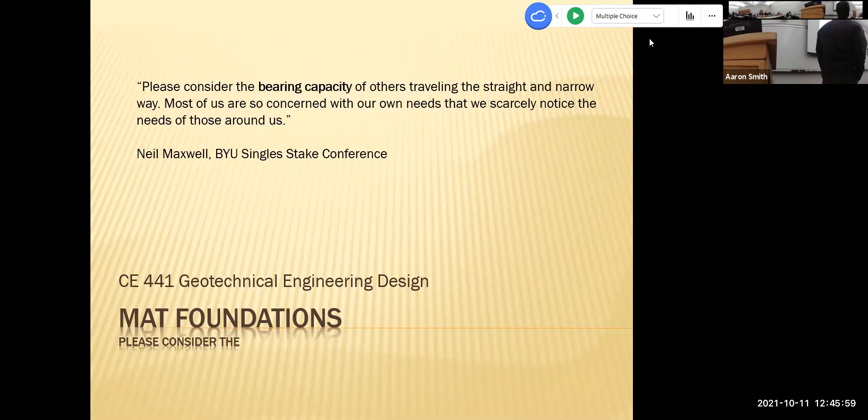A long time ago, when he was speaking to the singles stake conference, he says, 'Please consider the bearing capacity.' We could just stop right there. An apostle said the word bearing capacity. I love that. You should go search, find any others, go hunt. I would love for you to send me an email if you find a quote from a leader who talks about soil mechanics in their quote.

This is awesome. Please consider the bearing capacity of others traveling the straight and narrow way. Most of us are so concerned with our own needs that we scarcely notice the needs of those around us. We all have a certain amount of capacity we can hold up, and sometimes we fail, right? The load gets so much, we just burn out. It gets hard, it's tough. It happens in school, we just get, there's tough times. All of us have difficult things going on, and we're very concerned with ourselves, but be considerate of others, pray for others. I appreciate that prayer, Cindy, praying for others.

Okay, so let's start with some questions today before we go. And I heard through the grapevine that this is rare, if it ever happens, it's rare. The book has a mistake in it. Is that what I heard? Is this true? Could this really be?

I don't know. So let's do problem 5, or 5:16, together. Is that the one that has the 7:13? What chapter are we in? 7:16 or 5:16? 5:16, okay, 5:16. That was the one where we had that influence method where you had to have fun drawing little triangles and rectangles. Let's do that one together.

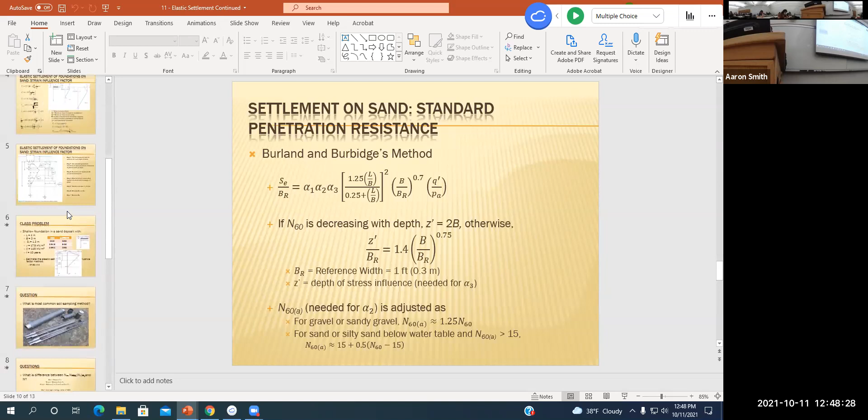Let me pull up a different lecture from last time. Let's see, elastic settlement. We were talking about this method right here, just look familiar, this is what our problem's all about. It gives us this equation, and it says, and so we need to figure out - we have a continuous footing, and we need to figure out how much it settles. Our equation that we're going to use is at the top, and we need to figure out all these things.

Now, I think we can just start with the low-hanging fruit, the easiest values to grab are these C1 and C2s right after that, and they're given to us right here.

The only thing we need to understand is what's the difference between Q and that Q with a little dash on it. Who wants to teach? What's the difference between Q and Q dash? Oh, Q dash is your effective stress minus your load, the load of the footings.

So in our problem, what is our Q dash? Perfect, so we have little q prime equal to 195. Does everyone feel good about that? Okay, so we do need that for this C1 right here.

But what about the top, the numerator? What's Q? Effective stress at the base of the foundation. So how do we calculate that again? We need to get this Q now. It's effective stress, it's the unit weight times the depth. So what's our unit weight of our soil?

18. Okay, so how deep are we down to the base of the footing? Is that what it says right here, the base of the foundation? 1.5. Okay, so what will this equal then? 27. Okay, so we can knock out C1.

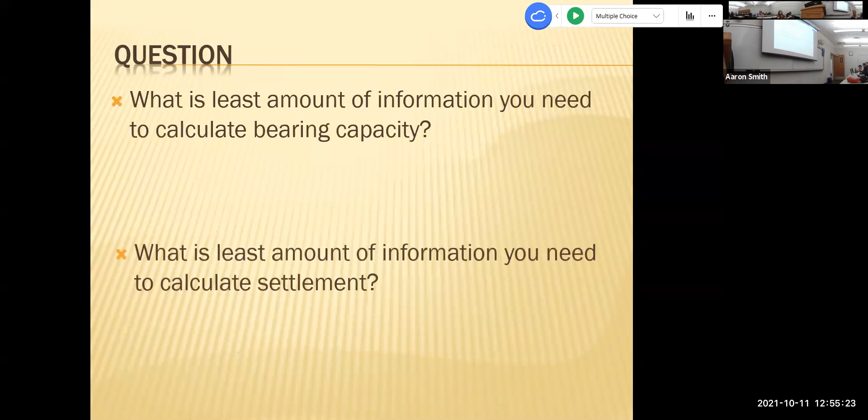Okay, so far we've kind of figured out some of our variables, but now the hard part begins, making a little picture. I don't have a very good picture to use. Let's see.

But we need to make something that looks like this. This is not your example, but we need to draw a picture, and we need to draw two side by side. The book gives us this picture right here. There's 3 different zones in the picture that's given to us. And then next to that, we need to draw the picture the book gives us, and right off to the side of that we need to draw this little triangle.

The triangle starts at 0.2 up at the top right there. And then we need to calculate this point, because then we'll just draw a straight line down to it. We need to calculate what its depth is. What is Z1? We already found out, we told ourselves Z1 is going to equal B.

So what is B? In this problem in the homework, I think the homework said it was 2.5. So we're going to draw a little triangle that starts at 0.2, and it's going to go to some maximum influence value, and it's going to occur at 2.5. That's what we know so far.

And then from that maximum value, which we haven't calculated yet, it's going to go in a straight line down to Z2, where there's no more influence, meaning the soil doesn't feel the weight of this footing anymore. That's going to occur at Z2, which we now know because we chose the chart, it's going to equal 10, right? 4 times that base. So we kind of know some points on the chart.

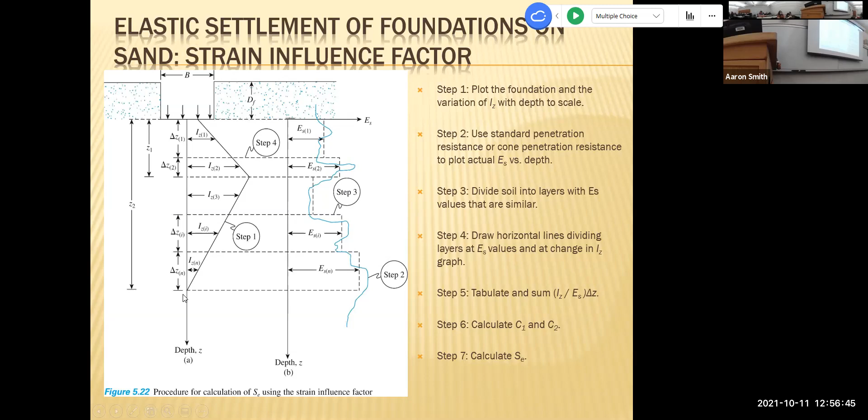We know where it's going to terminate at depth, and we know where it's going to start. We don't know this — how do we calculate this I max value? I think that was given to us right here. It doesn't really say it clearly, but I max, IZM, M stands for max.

It's going to equal 0.5 plus 0.1, and then it's going to use some of these Q's right here. But then it throws this weird value at us, Q prime Z1, whatever that means. Hopefully we have an equation for that somewhere. So to find the max, let's just do that equation really quick.

I think this is where things start to get squirrely. IZM equals, what do we got? We have some values that we already know. We can do 0.5 plus 0.1. Then we know some of these values, right? We know, what is that? Q, the big Q prime, what's that value going to be?

195. And then we're going to subtract what from it? 27, which we figure out over there. Then what goes down here? And that's where the big question is, right? That's where the book maybe has an error.

It does, it's a mistake. QZ1 — it's not defined on this page. I think we have to go to our textbook to figure this out. Let's see if we can figure this out. What page would it be on? I think this equation is on 258.

Okay, 258. Where is it? Oh, there's at the bottom. It says QZ prime 1 equals, it's at the very bottom of page 258. It says it equals the effective stress at a depth of Z1 before construction of the foundation.

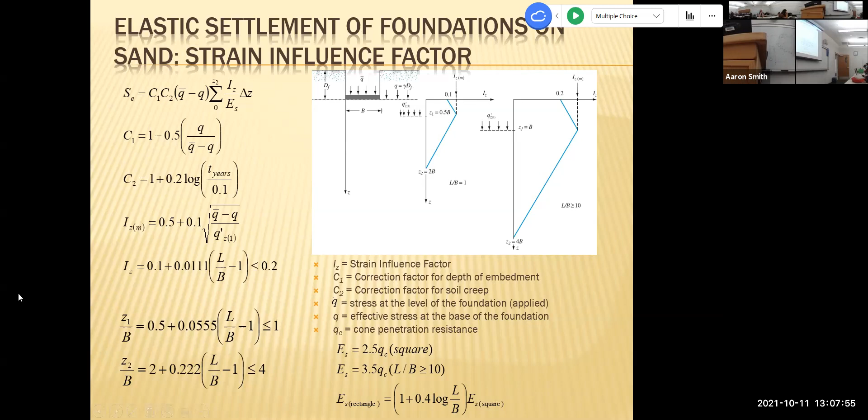Any other questions about that one? That was a good one. And the others were way more straightforward—we just used the N value, the blow counts, and estimated settlement.

So far we've talked about bearing capacity of soils, many different conditions—interlayered soils, stiff soils over soft soils, a water table in there, slopes. We talked about slope safety and factors of safety on different slopes. We talked about settlement, and there are many different ways to do settlement.

So today we're shifting gears. We're moving to a totally different topic, and we're going to talk about it for the rest of the class. Really, we're kind of done talking about settlement and bearing capacity. Now we want to start designing foundations—this class is about designing foundations.

But before you can design a foundation, we had to first understand that most soil fails in one of two ways: either too much settlement or not enough bearing capacity. So you'll have shear failure, the building will tip over. Now that we know how buildings fail, let's learn how to design walls, piles, and different kinds of foundations. That's where we want to go.

So we're going to start, and we're going to go pretty quick for the rest of the semester. We'll spend about 2 days on each of these different ways of designing walls, foundations, piles, and drilled shafts. Then we'll round up the semester talking about ground improvement—you roll up onto a site with terrible conditions, how do you improve the ground? That's where we're headed in this course.

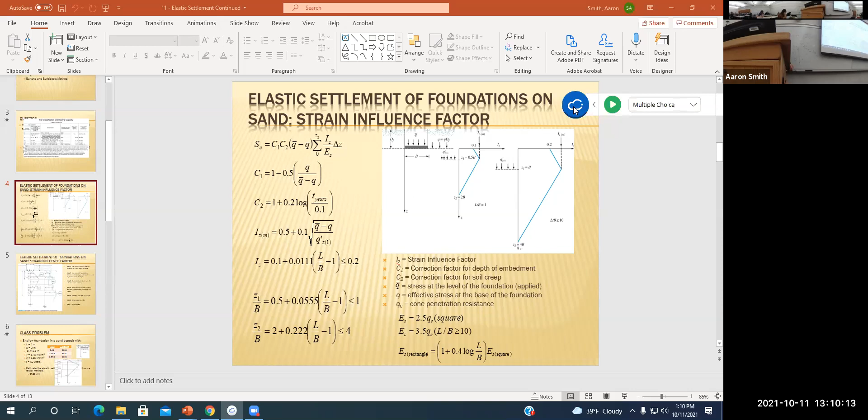If you have a question about settlement, you probably will see a lot of these. I should pull up the PDF, the technical portion you can use—you have all the equations for the FE exam in that packet. I'll make that available to us at some point. Hopefully some of these will be familiar when you see them. That's the whole point: if you ever have a quiz or test question, you want to recognize, oh yeah, I've seen this kind of before, I recognize some of the factors.

Let's try iClicker though. I want to make sure we have iClicker accessibility, so log in—this class is under 441. Let's just see if we have iClicker available. I do have a few, but I just want to see our level of understanding, really how much we remember from 341 as we talk about a new topic today.

Chapter 6, mat foundations—that's where we're headed. And while you're loading up iClicker, oh, you're fast, I got 15 responses.

I do want to read the introduction to mat foundations. It says: under normal conditions, square and rectangular footings, such as those described in chapters 3 and 4, are economical for supporting columns and walls. However, under certain circumstances, it may be desirable to construct a footing that supports a line of two or more columns—these footings are referred to as combined footings. When more than one line of columns is supported by a concrete slab, it's called a mat foundation. That's kind of where we're going today.

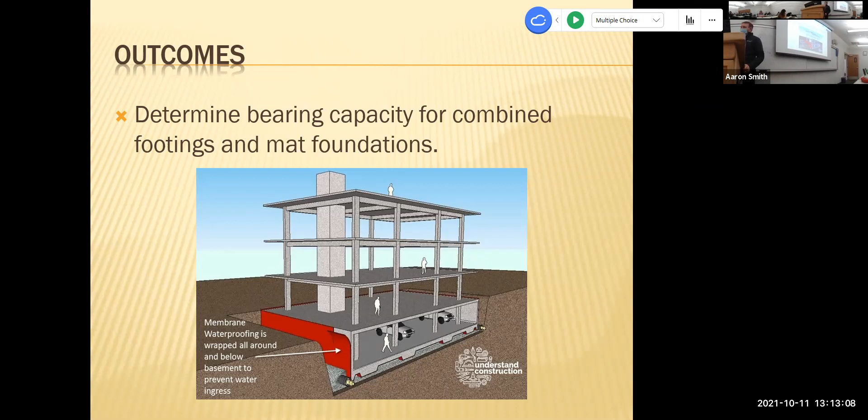That's what we're talking about right here, the concept of this foundation type where you've got one continuous foundation supporting the loads. No more strip footings, like you see on residential homes going around a home's wall, or just square or circular footings anymore. We want to talk about how you determine the bearing capacity for something with a combined footing or a mat foundation, also known as a raft foundation.

So question: does the ultimate bearing capacity typically go up or down when using a mat foundation? What do you think? Is that the idea of using a mat foundation? Does that help you or hurt you for ultimate bearing capacity? Let's give out 2 responses. Well, another iClicker question, we'll have maybe 3 or 4 of these today. I just want to see what you think, and the only way you'd know this is maybe through the reading or watching the video before class.

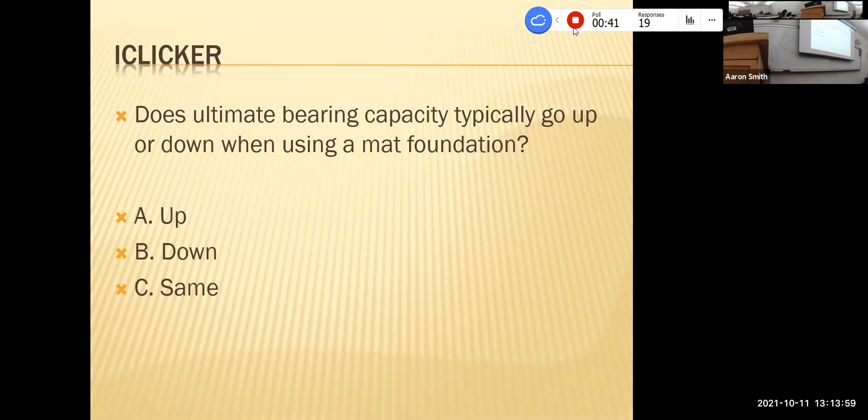Ultimate bearing capacity of the soil, up or down? Well, I guess the gross bearing capacity. Maybe I should put gross. Yeah, all right, good job. There's 19 responses, 20, even better. Okay, it goes up. It does go up. That's perfect, right? You have more ability to hold load because you're making a bigger and bigger footing.

There are some things to worry about though. We did hint before that if you start packing two footings closer and closer together, their zones of influence do intersect. At some point when you get two of them really close together, they intersect so much that you actually just design it as one.

So when you have two footings, this one can hold like 2,000 pounds, this one can hold 2,000 pounds. As you get closer and closer together, yes, they can both combined hold 4,000, but at some point they intersect too much and influence each other, so they can't hold 4,000, maybe it's a little bit less. But then there's a sweet spot where, instead of having two footings, you design one big one that can ultimately hold more, let's just say 5,000. I'm just throwing average numbers out there, but there's a game we have to play. Now we're just going to consider the fact that we have one big footing.

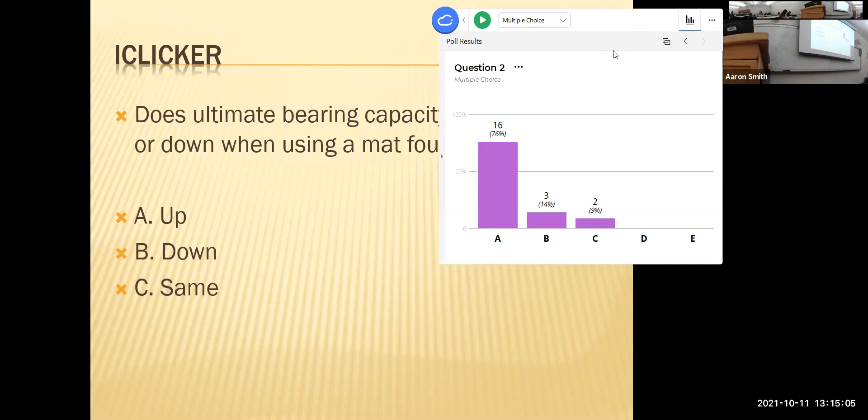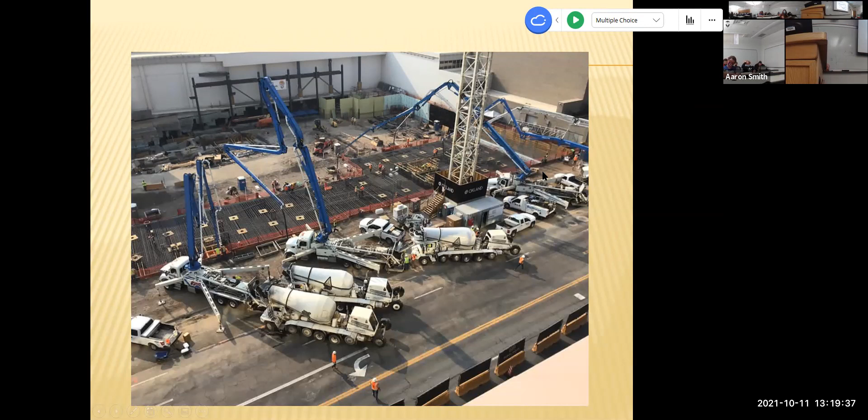So this footing right here, this is actually from the Hyatt project that happened in Salt Lake a couple years back. And again, another mat foundation, same picture, different angle. Look at all these pump trucks—1, 2, 3, 4 pump trucks going in. This was a project with lots and lots of concrete, a huge mat foundation. This took a lot of... if you guys like testing concrete, this would be a wonderland.

So here's what I was kind of wondering, what kind of approach do they use for the tall towers in New York? Oh yeah, they're so massive. Those are usually drilled shafts, and we'll talk about those in a little bit. Drilled shafts are just like giant piles, but instead of driving the pile into the ground, you actually auger out this big hole, 5 foot diameter, 10 foot diameter, go down 100, 200 feet, whatever it is, put a giant rebar cage in there, backfill with concrete. So then you have this giant concrete pillar, lots of them holding up the Twin Towers or something like that. Yeah, and it's expensive and it's massive. And it's exciting to be a part of big projects like that.

I hope all of you get a chance to be involved with some big project, whether as the concrete truck driver, the technician, or the guy in the field. I don't care what part you play. These are just cool projects to be involved with. I love projects like this. So 20 years from now, if you're just not getting out in the field enough, volunteer to be a concrete truck driver. You can see some cool things.

Let me tell you about this project though. It was big. It was a mat foundation. Oakland was the contractor who did it—I think there should have been an A in there, O-A-K-land. Concrete team was pouring 7,000 cubic yards. Mat foundation, Hyatt Regency, Salt Lake City. It's standing there right now, doing good, 26 stories tall. The pour began Friday night at 5pm and was completed 6:30am Saturday morning, so 13 and a half hours, 2.4 million pounds of rebar. You can see those mat foundations, lots of concrete and steel in them.

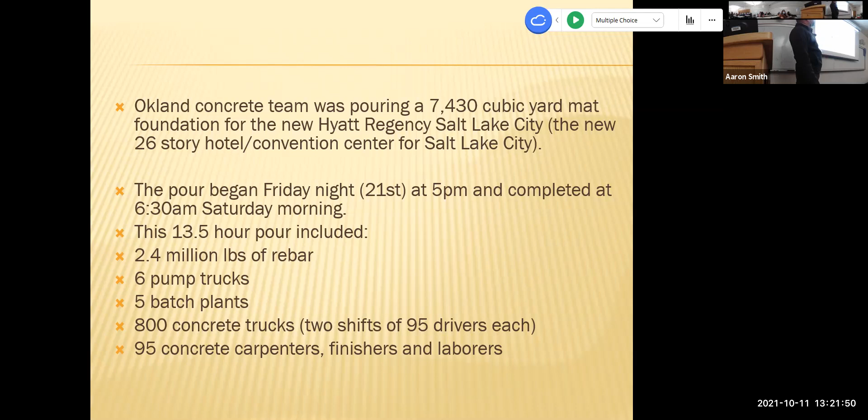6 pump trucks, 5 batch plants, 800 concrete trucks, 2 shifts with 95 drivers, 95 concrete carpenters, finishers, labor—lots going on. If you were a concrete technician, you were probably standing at each pump truck, sampling maybe every 4th truck, pouring as fast as you could. So by the end of the day, how many sets of cylinders would that be? For 7,000 cubic yards, if you're testing every 100 cubic yards, that's 74 different sets of concrete by the end of that day. If there were 6 technicians at each pump truck, in 13 hours you'd probably make a dozen sets, maybe one every half hour. That's a lot of work.

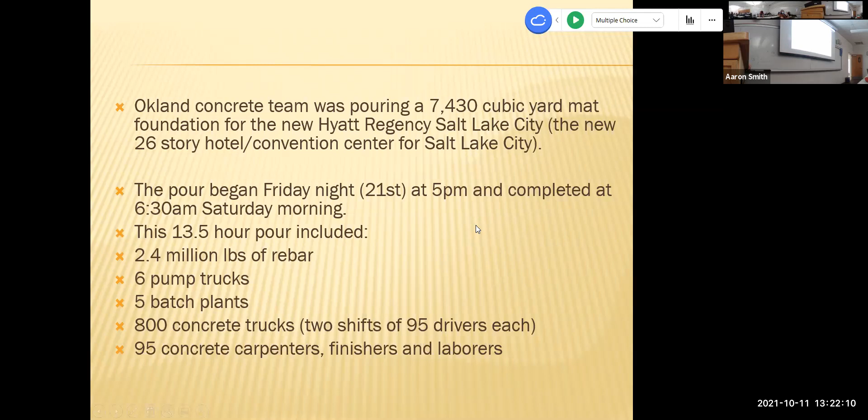Anyway, fun projects, they're big, there's a lot of steel involved. This is actually inside the mat foundation, looking out, from Okland Construction's website, of that concrete pour. This is a massive amount of steel. In that steel class you guys are all taking right now, maybe you can tell what kind of rebar this is—you can see the stamp up there. It's like an 8 bar, about 1 inch diameter, a big bar.

Impressive. Mat foundations are strong. It's what you do when you've got poor soil to build on. But we need to talk about the bearing capacity of these. Before we calculate it—and you're going to like how to calculate the bearing capacity of a mat foundation, it's not too crazy—I just want you to tell me: what are some reasons why you would choose a mat foundation? We're not going to have multiple choice questions, but what do you guys think? What are some reasons from the reading or just intuition? When would you do it? Why would you do it? What are some thoughts?

You've got to distribute the load of the building over a really large area—it's not just one specific spot where a foundation sits, that's the entire area. So there's a lot of column loads coming down. Would you want it for soil that's just not as strong? Yeah, you've got to spread it out. If you designed a bunch of small footings but found the soil so weak you had to make them not 5 feet by 5 feet but 10 feet by 10 feet, now one column footing butts up against the next, and you end up designing a mat foundation anyway when you originally were just trying to do spot footings individually—because the soil is weak.

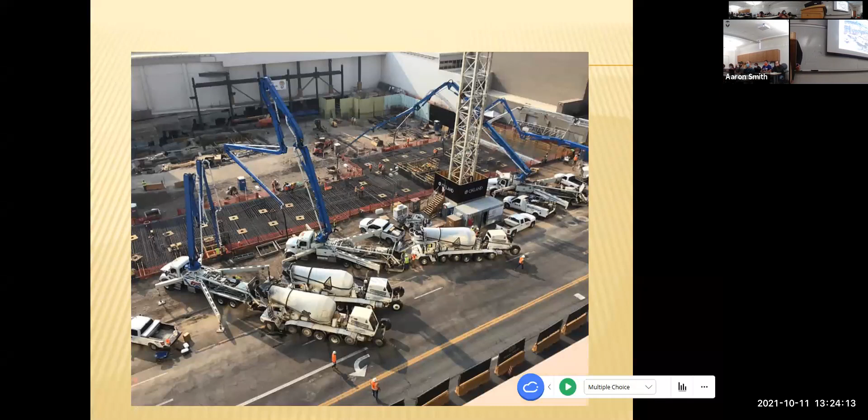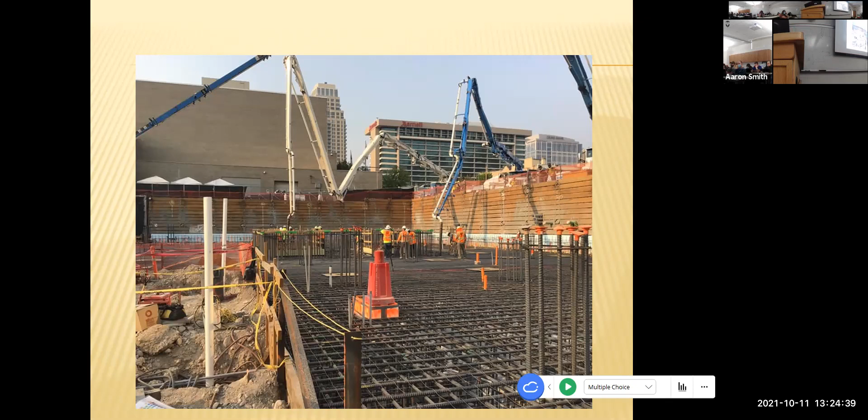What else? What are other thoughts, other observations from some of these pictures you saw? What are some unique things you're seeing in this picture—like how close is this pour to the neighboring structures? Look how tight this is, these tight quarters. There are big buildings all around here. When you have a footing that comes down, a normal footing, you design it like this—so if a column comes down, you want a footing like this. But what if this is the property line right here, and your neighbor's already taken this? You can't build a footing that looks like that. It just doesn't work, so what you have to do is create this giant mat foundation.

So the amount of real estate you have would be a reason. As mentioned, if the soil has low bearing capacity, the load has to be distributed over a large area. If you're designing all these spot footings and find you cover up 50% of the area anyway, why not just go and do a mat foundation?

Is that because you would save on labor? Yeah, it just makes it easier. Maybe you'd have to make each footing so beefy and thick, but you could thin the mat out a little bit and just spread it over a whole big area. So you'd save money in the end.

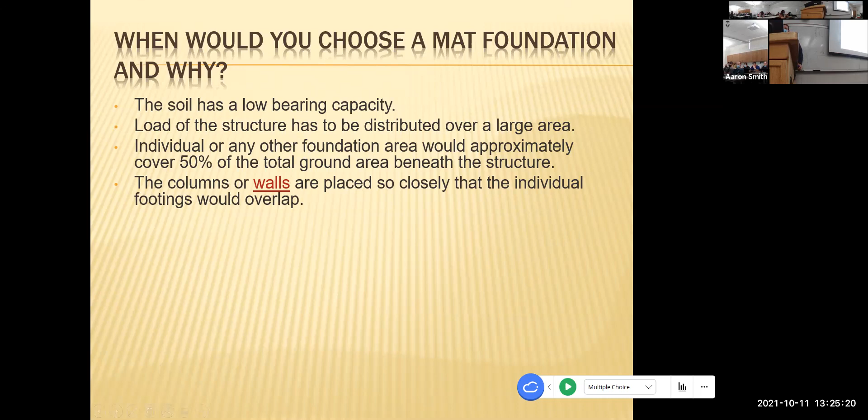This is what I was talking about. The walls are so close, so on the side of the building the stress on the soil needs to be reduced. Differential settlement: if you have a bunch of single footings over this big area, you run the risk of a site with different soil conditions from one end to the other. Maybe this footing will settle half an inch, this footing will settle an inch. You don't want all these little possible cracks from one footing settling more than another. If you just had one big mat, it would bridge over any of these soft spots.

This is the same thing when the soil strata is unpredictable and there are pockets of compressible soil - go ahead and use a mat that will bridge over anything. In Florida, they have a lot of karst topography where water could carve out little caves under the ground. If that's a possibility, use a mat foundation. Because if you just had 5 or 6 footings, what if one of those was over a cavern? Whereas with a mat foundation, it could bridge and handle an area that's softer. Or if you do a basement, that's a good idea as well.

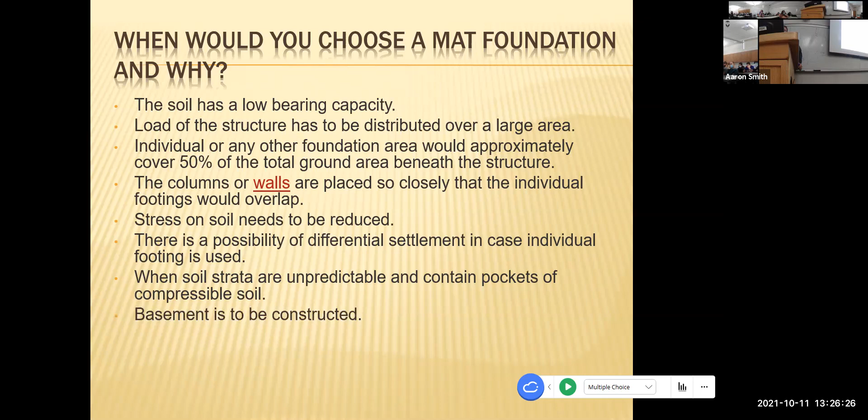I'll save these videos for later. They're just on how to compact ground. If we have time, we'll get to that.

Let's talk about situations where a single foundation may extend beyond the property lines - how would you even design it? Normally you'd have a footing that comes down as a nice square, circular, or rectangular footing. But what if the property line's right here? How do we design a foundation like this? We have property lines, and normally your footing would extend this way, but you can't now.

The method is first you've got to figure out where the two loads are coming down - Q1 and Q2, the big loads coming down from your columns. The area of footing you'll need to support that is equivalent to the total load divided by the net allowable bearing capacity of your soil, then you'll know the area. Then to figure out the total lengths, you follow a process to calculate the length between the two footings, and the width.

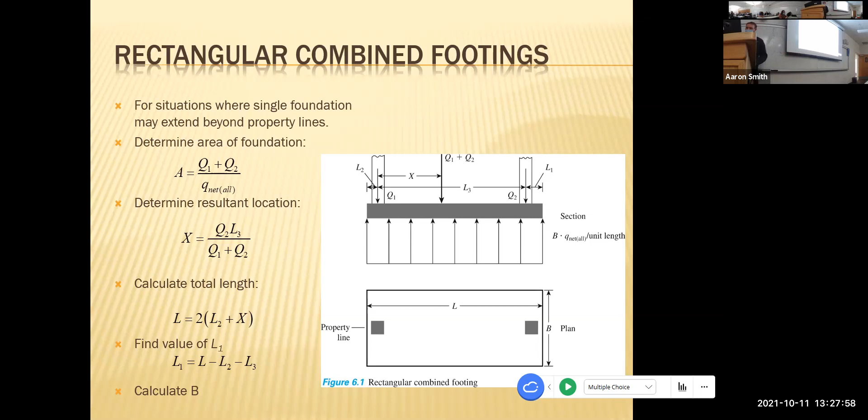Mat foundations have this method you can follow - it's not too crazy, you just slowly go through the steps to design it. A mat foundation normally has lots of columns coming down on it, and you don't just have to do rectangles - you can do trapezoidal areas, many different shapes. Maybe one side of the structure is a lot heavier than the other. There's an approach to figure out the total area you would need.

If the area ends up being over 50% when you're just doing little footings, you can go into this approach to see what shape and area you'd need to hold up your foundation. Of course, if your loads are so immense, maybe a mat foundation won't work. A mat foundation works if the loads divided by the bearing capacity of the soil can fit in the area of property available to you. But there are conditions where the building's so big the area needed is bigger than the real estate you have. So mat footings are maybe a middle step towards a deep foundation - we've been talking about shallow foundations.

Mat foundations would be the next level. If your mat foundation area still wouldn't be enough to handle these loads - Q1, Q2, Q4, 5, 6, 7, 8, all the loads - this is just showing 2 loads, but you may have a situation where the area is just not big enough to hold this load. And so that's when we're going to get into deep foundations.

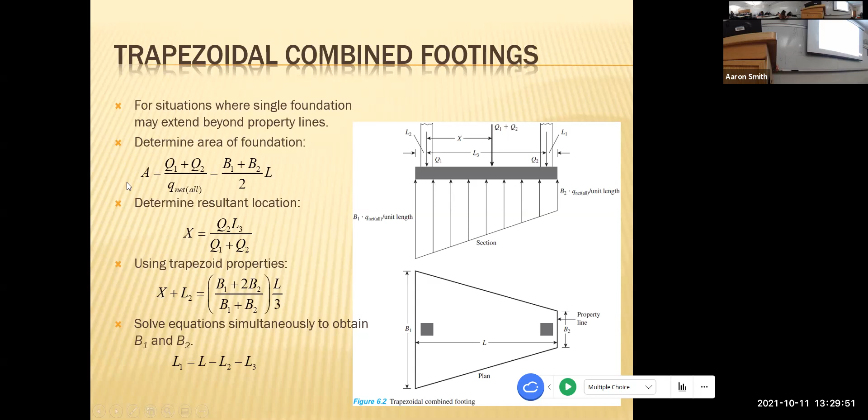Just know that mat foundations kind of are the middle ground. There's ways to figure out how much area you're going to need. Normally you have enough area, but the buildings just keep getting bigger and bigger, and at some point you'll run out and you'll know, okay, mat foundation is not for us.

Now there's different kinds of mat foundations. Maybe you've seen some before on construction sites. The book just kind of goes through a couple different variations. The main variation is this one will just be like a very flat surface on the ground. Here you can deepen wherever you have a column on it, you can widen them a little bit more, or you could put a basement in there, have some big walls or something. There's just many different kinds of mat foundations.

Actually in Texas, mat foundations have a hybrid version. I wouldn't really call it a mat foundation, but it looks something like this middle section B right here - a flat plate thickened under the columns. Homes in Texas are all built on clay, and so what the contractors typically do is pour the home on a big concrete pad.

What they do is dig deep trenches kind of on a grid pattern. The trenches go down maybe 3 feet. So what you'd have looking at the side of it would look kind of like section B. You'd have your 3 or 4 inch slab that covers the whole foundation of the house, but then you'd have these little nubs that come out down 3 feet.

What they actually do is run these hollow plastic tubes down the length of the house from one end to the other in a grid pattern, running north to south and east to west. They pour the concrete slab, and then after the concrete's hardened they post tension those hollow tubes - they can run a cable inside of them. So the cable has never been embedded in the concrete.

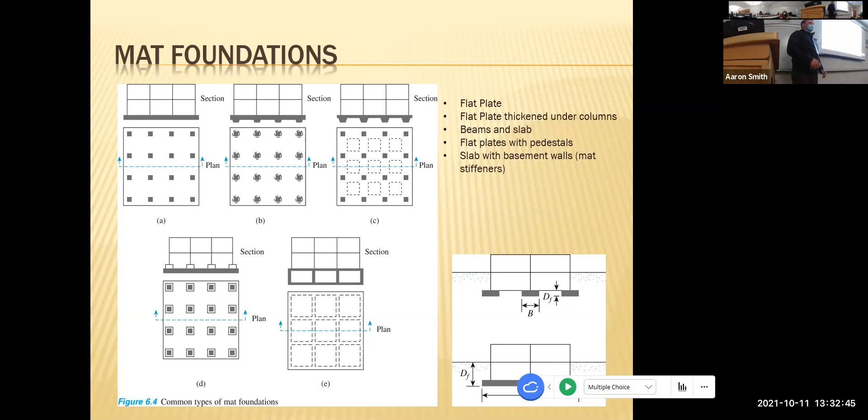Just like that picture we saw, that guy was able to lift his whole car just using the pressure from his exhaust - that's not a lot of pressure, that's like the amount of pushing with your one finger. But imagine clay has like millions of little fingers all pushing up with 1 pound, and your house is getting lifted and cracking, things like that.

So anyway, there's lots of different mat foundations. But our main question is, okay, so I figured out the area that I need to hold up my soil - how much can it hold?

So we're going to go back to the general bearing capacity equation. These are the exact same slides resurrected from chapter 3. Meyerhof's equation is here again, and you may be familiar with hunting these things down. We'll have an exam question - I think we'll use something like this. So we're going to have to be familiar with this.

So this is good practice again. We're going to have to be familiar with this table, right? For every one of those factors, there's a way to figure it out, depending on which conditions you have. If your depth of soil divided by the width of your footing is less than 1, or if it's greater than 1, there's all these different relationships. We need to understand them because for mat bearing capacity equations, we use the general bearing capacity equation that we just showed.

And how you figure that out is you have to subtract the soil above it, right? The soil can hold a certain amount, right? That's some bearing capacity. So if the soil can hold a certain amount, you just put your big mat foundation on it. Normally you don't put your mat foundation right there. Normally what you do is you bury your mat foundation a certain depth down under the ground. You dig a hole, put your mat foundation in, and then you build up from there.

So what we're saying with this equation right here is that the Q net U, the ultimate net bearing capacity, is equal to QU minus Q. Now we got 3 different Q's up there. What do they all mean? So the little q at the very end, the QU minus Q, that minus Q, that's this little value right here. That's how deep it can go down.

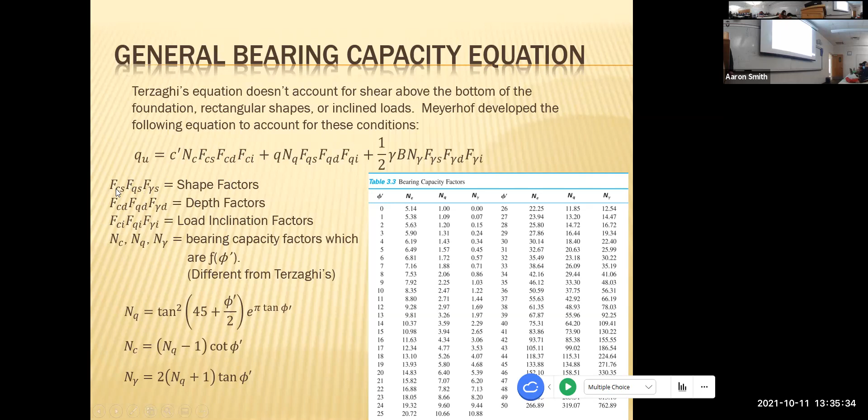And then all these little factors, they just grab the shape factors and everything from right here. See how this got a little 1 plus B over L, and they just put them in already. So they've kind of done the work for you, so you don't have to hunt them down. So gross ultimate bearing capacity for mat foundations in saturated clay, where phi is equal to 0, you use this equation. And these numbers are - QU is the stress that the foundation puts on the soil.

Is that what QU is? Yes, this is your load. Subtract out the amount of weight of your existing material, leaves you with the net allowable that you can then put in there. Your ground can handle this much, so you can only put this much on it.

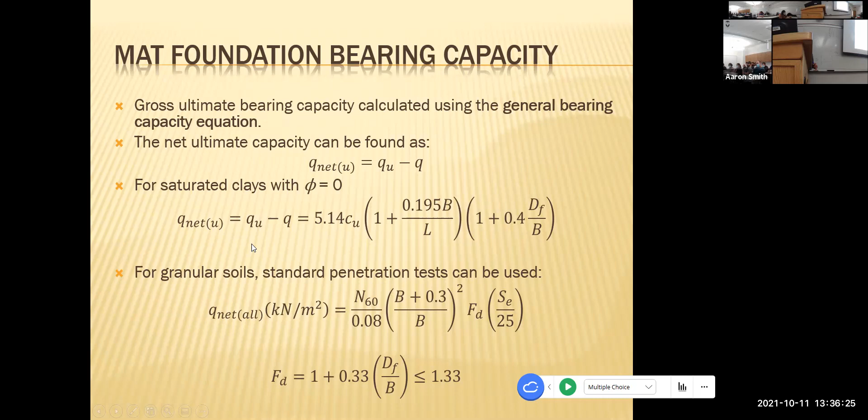Okay, so there's 2 new equations right here. Then, if B gets a little bit larger and you want to use N values, you can do that as well. So notice this one's for SI units, this one's for US customary units. So there's just 2 equations.

And if you know settlement, you can put this in here and calculate net. Now, maybe you don't know settlement - what would you pick? You would have to choose your own settlement in millimeters. What's the maximum amount of settlement you allow on this building? You put that in there. Notice that if you put in 25 millimeters, that just goes to 1. So 1 is actually what I put in. I'd say settlement of 1 inch is common.

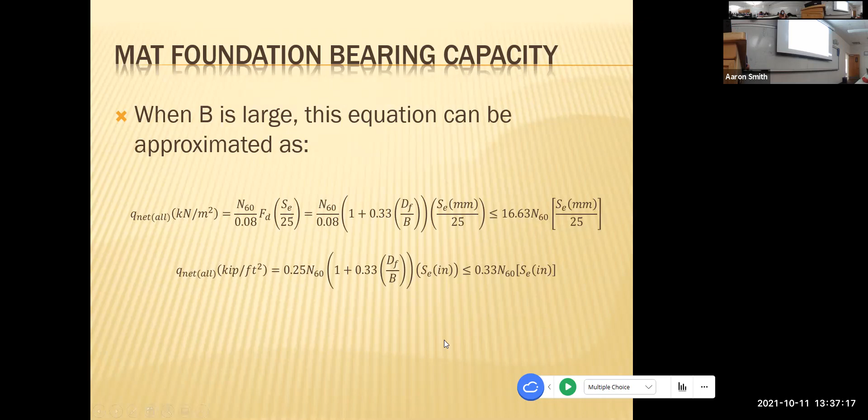So what would you pick? Pick whatever you want. I would never go more than 3 inches. And the book has some good recommendations. I think as you go through here, it has some recommendations based on observations, on kind of how to reel you in as a geotechnical engineer on what you should pick and what you shouldn't pick. Can't remember what page it's on, but I thought it was in here.

So let's just try an example. There's 2 examples I want to go through real quick and then we'll wrap up. So there's just those 2 equations for today. Determine the net ultimate bearing capacity of a mat foundation, 12 meters by 10 meters - that's big - on a saturated clay. So there's no friction, so we just have cohesion. CU of 105, no phi, friction angle 0, and we're burying it 2.5 meters under the ground.

So we grab that equation from the previous page, value, this equation right here, and we start plugging in what we know. We know CU, that was given to us. This value comes pre-filled from the table. All we really have to put in are our base and length values right here, and over here again, how deep are you going and what's the base? It's a pretty basic equation, derived from Terzaghi, and it helps you calculate bearing capacity, what that value is. Any questions on this example?

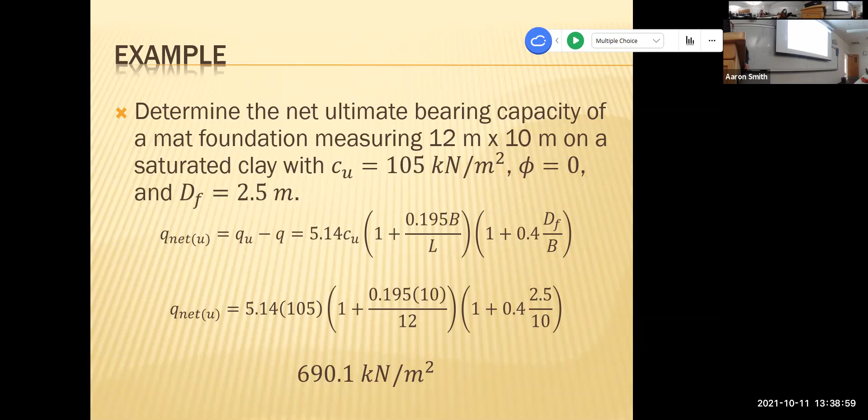Let's look at one more. Determine again the net ultimate bearing capacity of a mat foundation, same size. This time it's not on clay, it's on sand that has blow counts of 12, and you're saying the allowable settlement is 20 millimeters. That's one thing you have to recommend as an engineer, what the allowable settlement is, and I'll let you choose that. In this case, they're saying just less than an inch.

So again, if you're presented with blow counts, the main thing we need is how deep are you going to bury it, FD, not DF. You have to be careful on that. What's FD again? Does anyone remember what FD is? Not to be confused with DF. How do you figure that out? We used it on the last one. Who remembers what it is?

Depth factor, yeah, it's unitless, right? How do we calculate it again? I don't have it on here. It's 1 plus 0.33... it's this guy right here. Okay, yeah, so that is here. FD is 1 plus 0.33, and then it's your depth divided by the width of your foundation. Perfect, so just be careful that whenever you see that, you recognize what it is.

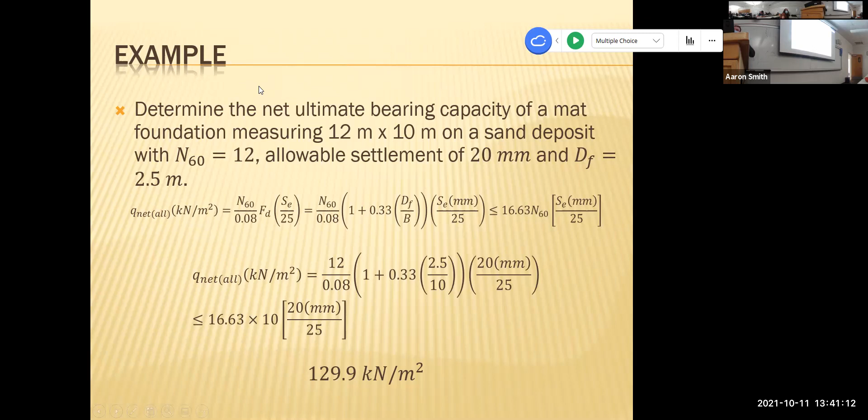This mat foundation I find is a lot less tricky, there's no tables you need to use. Generally, shallow foundations are designed for a mat. What do you usually put in there? You used to have 25 millimeters, 1 inch. What would you put? Here's a quick poll, I just want you guys to respond, go into iClicker. Generally, what would you pick: 1/4 inch, 1/2 inch, 3/4 inch, 1 inch, 1.5?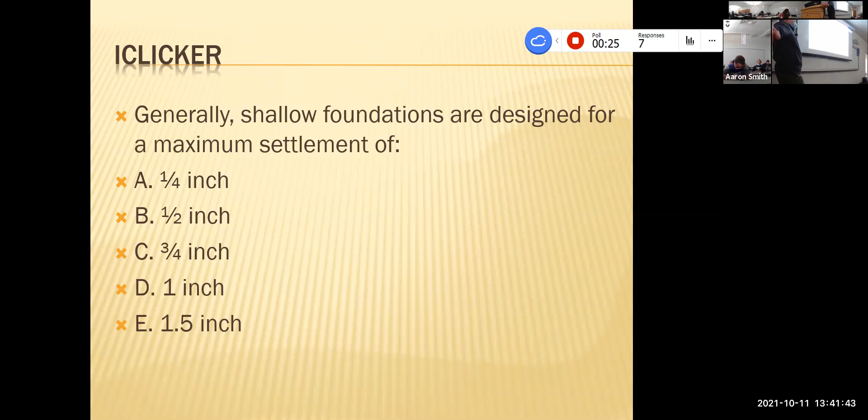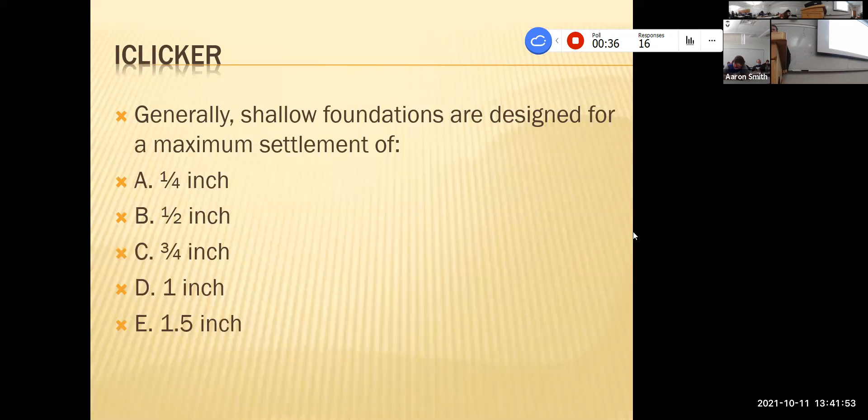You can't choose anything you want, right? But what's generally what do you put? I've probably said it many times, I said it today, what would you put in there? Let's see what you guys are thinking. Okay, good job, 1 inch, that's what I thought you'd do. And 1/4 inch, that's rare.

Now why is that a big deal? What if you said, hey, I'm an engineer and my foundation is going to be designed for a maximum settlement of 1/4 inch? What are you telling the client right there? What's the difference? Why would you have a lot more? You're going to pay a lot more for it. Right, so you're trying to get more compaction in the soil, or pay a lot more for the foundation.

That's right, if you suggest these very little tolerances, it's saying you're being so conservative, they're going to have massive foundations so they don't get any more than 1/4 inch. But if you say your design calculations were based on the fact that you're okay with 1 inch of settlement, then it allows you to shrink up those footings a little bit. You can get a little bit of settlement, and in most buildings that settlement happens at the very beginning, so it's safe. 1 inch is safe. If you say you can handle up to 1.5, that's okay. I would never go above 3 inches, I've never personally said anything more. 1.5 is probably the most I've ever said, and that was on a site where after I looked at all the values and ran it in the spreadsheet, it was giving me some high values.

And I was just kind of playing around, like, okay, what if I took out 2 feet of soil underneath the foundation? And that's what you do as an engineer. You just play with your spreadsheets and try not to recommend crazy values. You want to stay in a reasonable range, and so you just try to optimize.

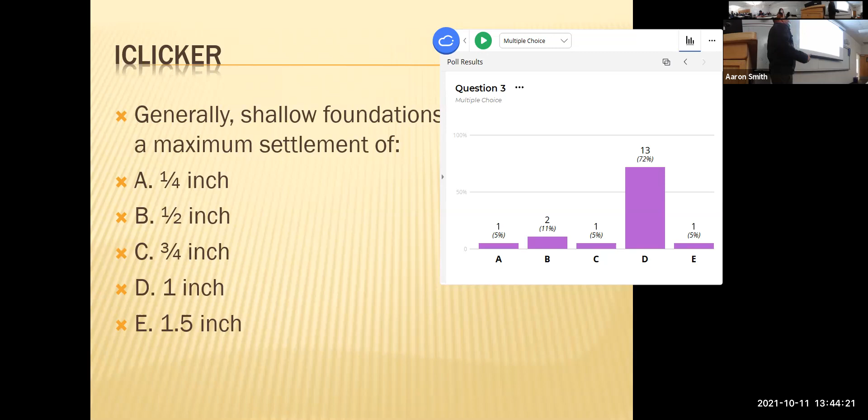So if I ever have a soft site, before I would recommend a footing with 1 inch settlement, I would say, well, maybe what I could do is recommend putting a foot of fill across the site, and then I can increase my bearing capacity. If the clay can only handle 1,500 pounds per square foot, why don't I recommend maybe 2,000 or 2,500 pounds per square foot with a foot of gravel on it? Then we just let the designers take it from there. As geotechnical engineers, you don't have to give them all the answers, just some general guidelines.

Okay, maximum settlement. What about differential settlement? What would you do? Last question. Differential settlement, what would you say there? We haven't talked too much about differential settlement, but you can imagine you build a building, you get some differential settlement. If you're going to make some recommendations, generally your foundation is designed for what? There haven't really been equations about differential settlement. There are some sections in the reading that talk about it, but we're not getting into that. I'm just curious what you would put.

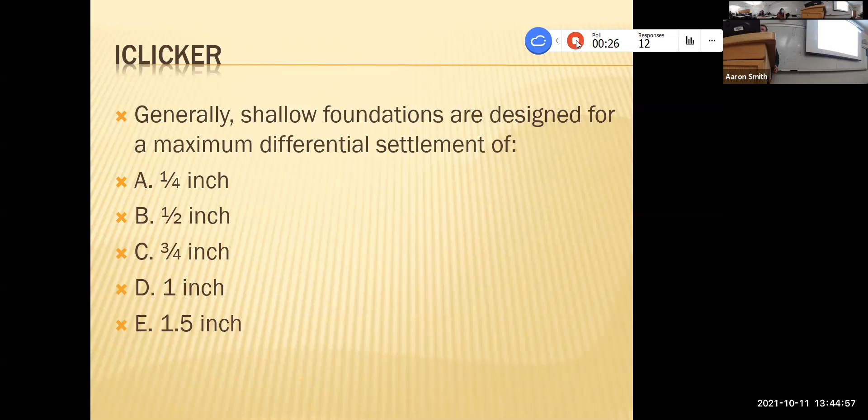Okay, let's see. B, 1/2 inch, okay, and I think that's appropriate. I wouldn't put 1 inch, I wouldn't put 1.5 inches. Differential settlement means you have a big foundation and one side of your foundation can move by up to 1.5 inches. By the time concrete does that, it's starting to crack. But concrete can handle B, 1/2 inch, 1/4 inch. I'd even recommend that sometimes. So we're in this ballpark, there's nothing wrong, but B is probably the most recommended value right there.

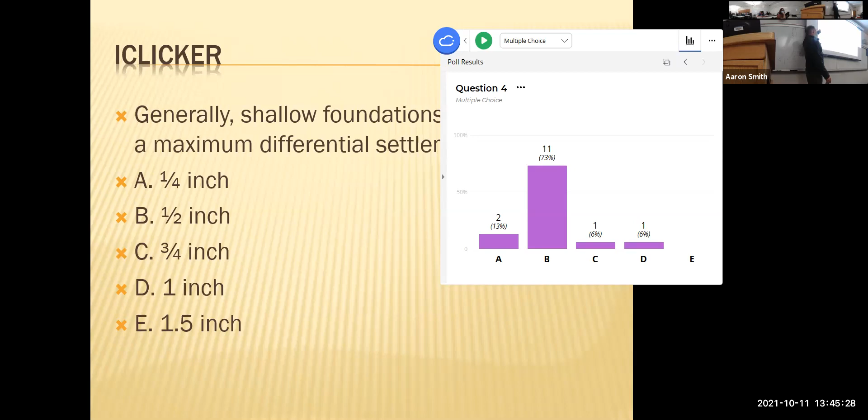Okay, so your homework is going to be pretty straightforward: 1, 2, and 3 from the book. I don't think there are any errors in these 3 assignments. So you'll just use those 2 equations, either US units or SI units.

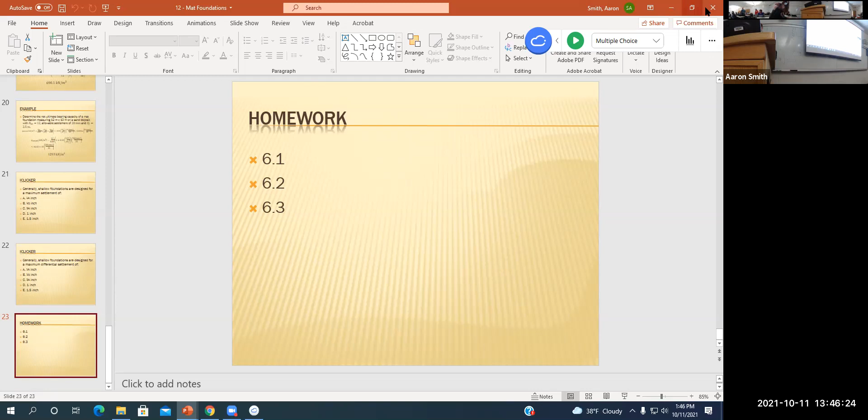Yes. Yeah, I just wanted to check the problem. I was using the PDF until I got it, because I checked my book and I'm like, no, it's the same. But his PDF was more in one unit, like the meter. Yeah, because your pictures were the same, it's just different numbers. The thing is, I actually knew the key, so I would use the same numbers and then change it just to check if it would be the same, and it was the same. So, but yeah, thanks though.

I gotta go finish with the concrete and start.